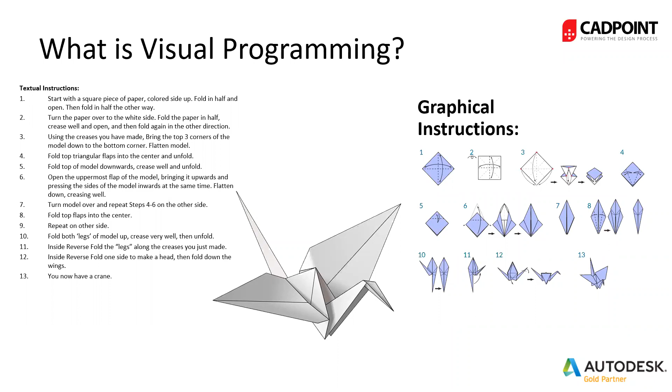It's the graphical representation of a set of instructions. You can see here on the left-hand side, it's to make an origami crane, for example. And you can see you might have a list of textual instructions, and that's the way you need to think about Dynamo. How would you instruct somebody maybe in a textual format or in a verbal format? You know, perhaps it's like if you think of an IKEA piece of furniture, you have a set of instructions, and that's then transferred into actually enabling to put something together. And that, again, that's the way to think about Dynamo. And then Dynamo is the visual representation of that textual information or instructional information that you're putting into it.

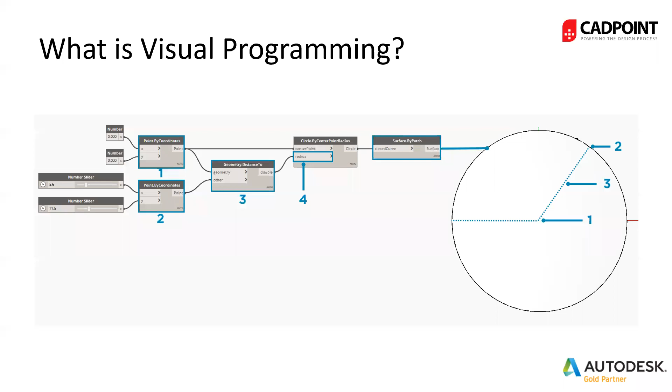And you know, it kind of varies. The steel size varies, or the steel width and height varies as the roof moves. But using something like Dynamo, you can actually automate the creation of all of those beams just by running one simple script. All you need to do is essentially define the height and select the top of your foundations.

And the roof was created first, the roof surface just as a single surface. And then the beam structure was created just by selecting the roof structure. So that's just how you can get really complex with Dynamo.

But today's focus is about getting started with Dynamo and how you can start to do very practical workflows, such as putting information into Excel, creating basic types of geometry in Revit. And the foundation knowledge is what we hope to deliver you today, that you're able to take that away and even watch back the recording of this particular webinar.

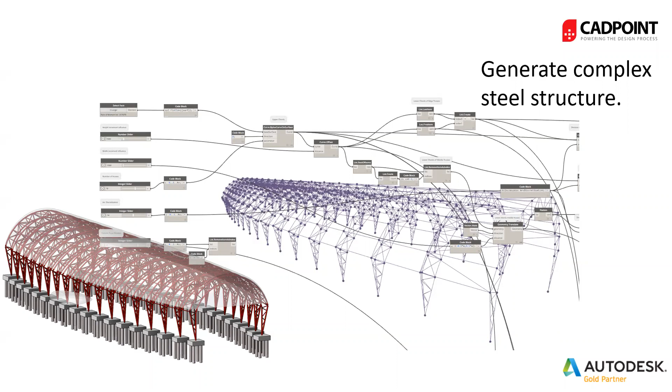And within the next kind of 30 minutes, I'm going to cover top 10 tips that I believe will help you get started using Dynamo, mainly focusing on architectural projects, but there's also other snippets in there, even if you're engineering or construction as well. So keep watching for that.

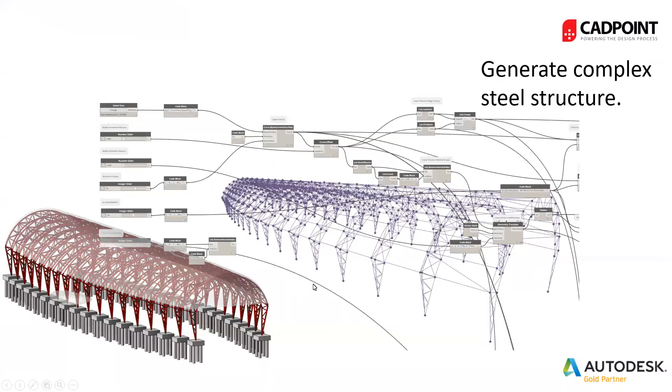Obviously, I'll keep a few minutes at the end for questions. I'm just going to jump into the demonstration that I've actually recorded here. And these are the top 10 tips as well.

So the first tip to get you started with Dynamo, it's good to understand at first that Dynamo is installed with all the latest versions of Revit. It is an open source software, so it's free. You don't need to purchase anything. There is Dynamo Studio, which is separate.

But just to understand that you find it under your Manage tab, and just at the end on the right hand side, you'll find something called Dynamo. So when you click on that, it will pop open a dark kind of user interface similar to this. You can see it floats over the top of Revit.

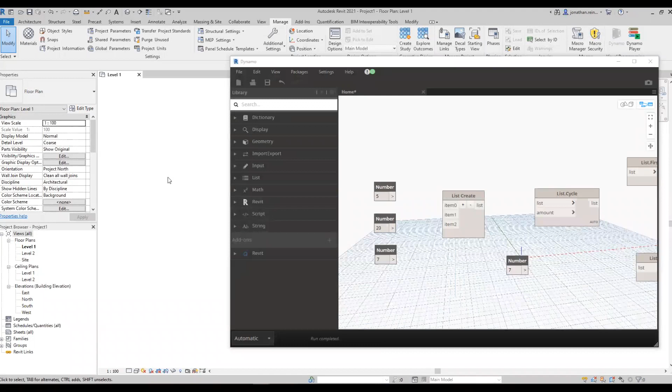And this user interface, I'm in Dynamo, but it knows that I'm linked into this particular project automatically just because I opened it. And that would be the same if I had another project open in the background. If I had a second project here and I clicked into that tab, it would know that I'm connected to that project. Therefore, anything I create within this Dynamo space will have an influence on the project if that's the type of script that you're executing.

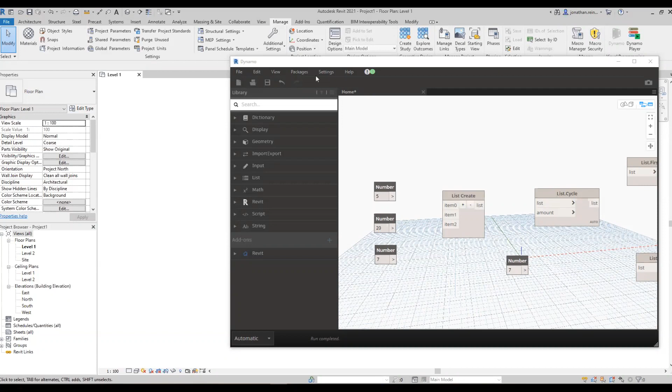And further on the user interface, within the Dynamo environment, you'll find on your left-hand side is where your nodes are stored. So this is essentially your node library. This is where you'll find the proprietary nodes that come installed with Dynamo, but you'll also find your third-party nodes here if you decide to use third-party nodes. There are a lot of them out there.

We won't go into them today, but just be aware that when you install third-party packages, they will appear under here under add-ons. So in the left-hand side here, you have your node library. You can manually click on each one and find what each node does. When you hover over a node, a little message box pops out and it tells you what it does.

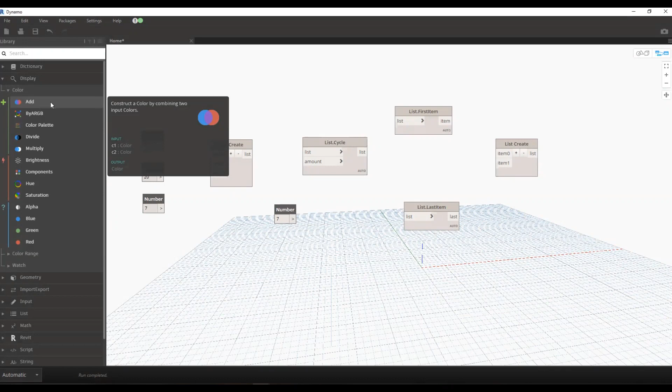When you click on that particular node, it will appear in your environment, and you can right-click on that, click Help, and it will actually bring you into a bit more information regarding what the actual node does in itself.

So you can also search for nodes in the search bar. So if I wanted to do something with Excel, for example, I could search for Excel and I can see import Excel. So that's one way of using the user interface, and then also being able to search in the node library as well. And you can also manually search within there as well by clicking.

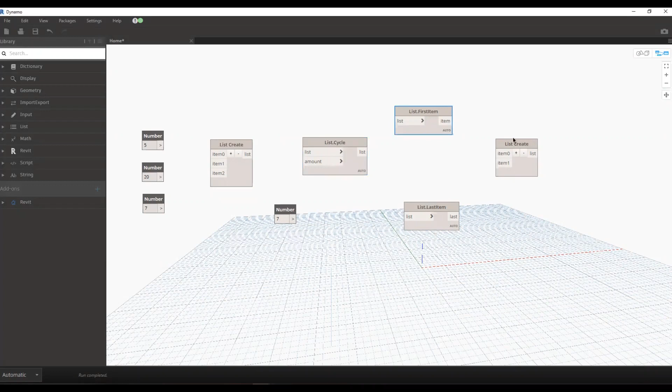So the second tip that we're going to cover today is just touching on what the actual nodes do. So what Dynamo does, it takes information that you give into the nodes and it changes that information in a certain type of way. So in order to create a script, it's made up of a series of nodes. So these are nodes here that we see on the screen in the gray boxes, and they all have different types of functions.

So the example here I'm going to show you is just using something called the list nodes. Now there are a lot of list nodes. So what list nodes allow you to do, it allows you to manipulate information from Revit in order to put it into either a different format or use it in a different way that Revit doesn't necessarily allow you to use it. So I'm just going to use a basic example here, just with some numbers, not in the Revit environment. We're just going to look at what list nodes do to a certain piece of information.

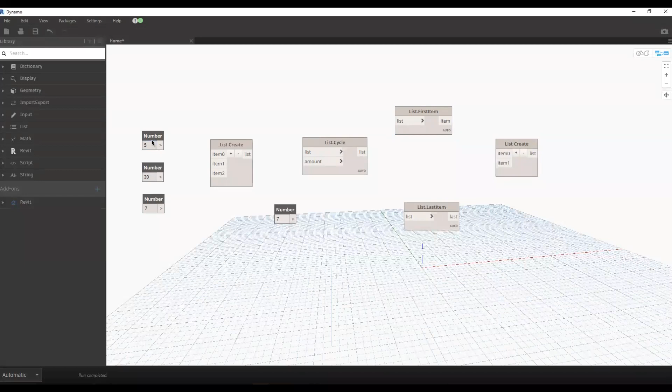So on the left-hand side here, I've put in some number nodes. So what these contain is essentially numbers. These could also be coordinates, they could be measurements, floor areas, quantity numbers, or any sort of information that you've taken from a Revit model, but I'm going to keep it simple for now. So what I'm going to do, I'm going to use something called the list create node. You can ignore all of this on the right hand side.

So the list create node, what I'm going to do, I'm going to pull all of these separate numbers together and put them together into one list. Very simple. So I'm just keeping this example simple just to explain the principle of it. So when I connect those in, you can see the top turns to a dark gray. That means that the node has actually performed its function and you've satisfied all of its requirements.

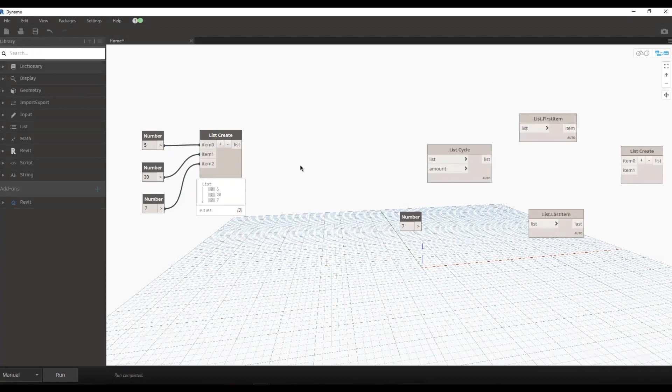So if I hover down to the bottom right, I actually see the result of this particular list. So that has taken all of these individual and separate numbers and put them into a separate list. So I'm just going to turn this off to manual from automatic. So that's put them into a separate list. So again, this could be parametric information, it could be measurement information or any sort of numerical information, or even it could be text information. You just have a text node put in here.

So further, to take that information and say you want to manipulate it in some way, we can also use something called a list cycle node. So what a list cycle node will do, it will ask me for an input of a list. So I know this is my list on the left hand side here. List is the output of this node and list is the input of this particular node. So because I can see that it's light gray, that means that I have not satisfied all the inputs, and the reason for that is because the amount one is still empty.

If I hover over this, it says amount, and in the bottom left it says int for integer. So it takes a number, or a programming term for a number. So I'm going to call that 7, and what this is going to do, it's going to actually create a cycle of these numbers 7 times. So it's taken 5, 20, and 7, and you can see it's created a list of all of those numbers. So 5, 20, and 7, 5, 20, and 7.

And I can see at the bottom, I can just confirm that I know that there's 3 numbers going into this list, and it's completing a cycle of it 7 times, and 7 by 3 is 21. So if I change that to 5, obviously it's going to change to 15, and it will create 15 items of each of those lists.

So say another couple of nodes that I want to manipulate list information with could be a list first item. So say, for example, you have a list of coordinates in here, and you only want to take the first coordinate, the last coordinate for whatever reason. You could use something called the list first item. So I can push that node in there. So the list first item is going to take the 5 out of this list, hit run on that, drop that down, it only gives me a 5.

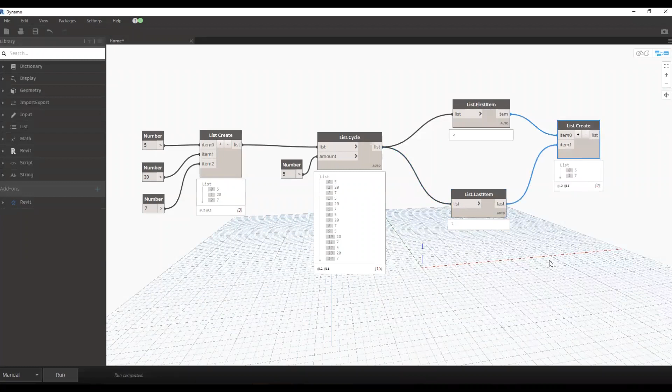And then if I put in list last item, this particular node, it will only take the last number of that node. So I just hit run and it's going to give me a 7 as a result here. And I can see I've got a 5 and a 7. And I'm able to then just pull those numbers together in a list create node, click run on that, and you've simply just pulled out the 2 separate numbers from this particular list.

So that's just one very basic way to understand how list works. And obviously you will be doing this with more complex information, construction information or design information, but just to understand the principle of those different types of list nodes. So to find the list nodes, you just go on the left-hand side, and you've got a list of different types of nodes under here that you're able to use. So it's good for you to get familiar with the different types of list manipulation that you're able to do with your Dynamo data.

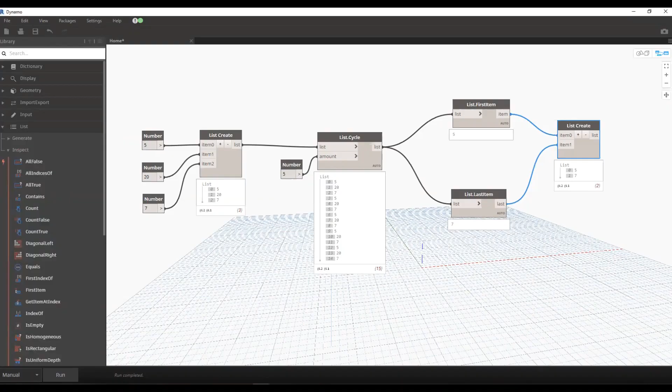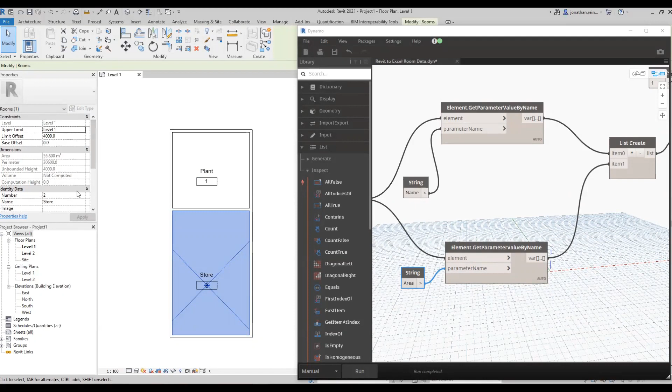The next tip I want to give you today is to show you how to target specific parametric information based on text values within your Revit project. So on the left-hand side here, we can see we've got a floor plan created, very basic floor plan, just of 4 walls and 2 rooms, a plant room and a storeroom. So within our Revit project, we know that if we select our room tag, for example, we can see we've got a series of parametric information here on the left-hand side.

Now, while it's not always possible to manipulate information from one set of parameters to another set of parameters within Revit, you are able to cross-match or bring in different types of parametric information into Dynamo and maybe push that out to Excel or some other type of CSV format, perhaps. So one of the nodes that I'm going to show you here is something called Element.GetParameterValueByName, and it does exactly what it says. And just to right click on this again, it gets the value of one of the element's parameters. So it's going to fetch the room parameters. I'll show you how I actually target the room parameters itself.

So it takes an input, Revit.Elements.Element, and that's just taking the room elements. This is taking in then the actual parameter name that I want to target. So this parameter name is exactly what I see here on the left-hand side. So if I wanted to pull in the area or the perimeter, I would create within this property box here one of those parameters from the left-hand side and put it in exactly as it is written in there. It is case sensitive, so just to be aware of that.

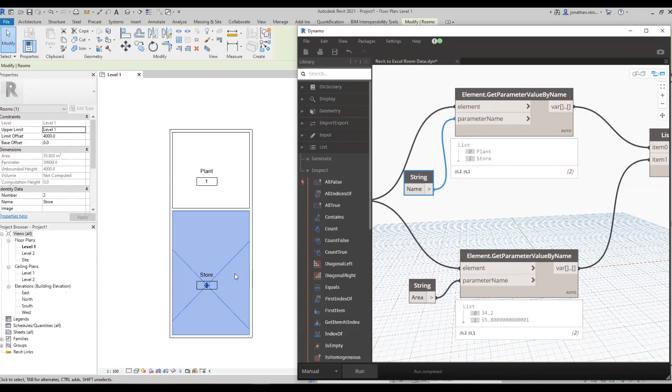So in this case, I've targeted the name parameter of the rooms, and I've targeted the area parameter of the rooms. So you can see that these are both of the nodes, and there are inputs. I won't go into that just at the moment. And when I hit run on this, it actually brings it into an Excel file, but we can see here that it's actually bringing that information. It's targeting the plant and the store, and it's pulling in those two room names, and it's pulling in the actual areas because I'm also targeting the areas of these particular room tags. So if I click on this storeroom tag, I can see the area is 55.8. That's my result here. And the same if I was to click on the plant room, it is 34.2. So you can see that's 34.2 as well.

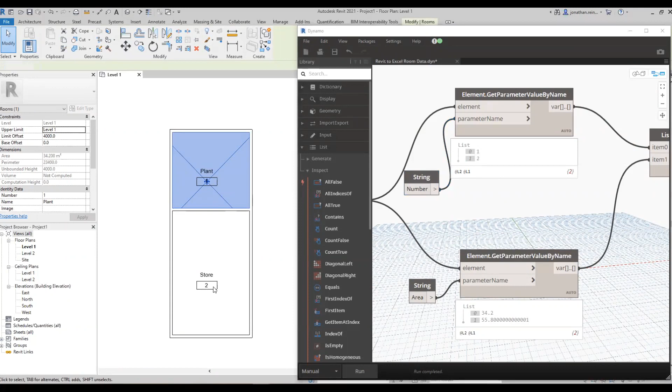If I was to then change this particular parameter that I want to target, so if I want to target the number, for example, I will just type in here, number, and make sure it's the same case as it's spelled here. Just click away into your space, hit run again, and I can see it's bringing in the numbers of those rooms. So number 1 and number 2, this is number 2, the store, and this is number 1 here. So that's just one way of targeting the parameter values by name.

The next tip I want to show you is about using selection nodes within Dynamo. So on the left-hand side here, you can see under your library, if you go to Revit and then go to Selection, there's a series of different selection tools. So essentially what selection tools allow you to do is select something within your Revit environment. So on the left-hand side, we've got All Elements at Level. So that will capture all of the elements at a certain level. You give it a certain level. All Elements of Category, so all of your rooms or all of your furniture. And there's a lot of different selection nodes here as well. There's also Categories, where you can just input rooms or a family category that is all selected at the same time.

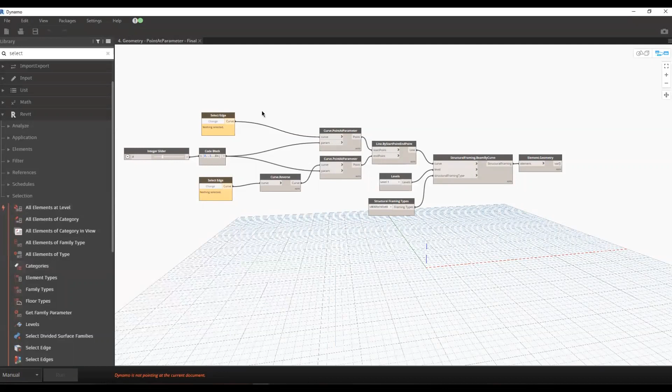So the example I'm going to show you here now is something called Select Edge. What this is going to allow me to do is select these two particular walls in here. We can see we've got a curved wall and we've got a kind of angled wall here. While I have my Dynamo environment open on the right-hand side and my Revit open on the left-hand side, I'm just going to select the different edges of these walls.

So simply by using the select edge, I'm going to select on the top one, I'm going to select that line there, and I'm going to select the bottom one as well. I'll show you the purpose of these. I want to capture those two lines. Say, for example, I wanted to connect beams across walls, I would use something like the select edge node.

When you use a select edge, it gives you the element ID of that particular element that you have selected. So that's the Revit ID of the particular object or family that you have selected, and the same for this one as well. So it's captured those two lines, and it's going to allow me to then manipulate that information in a further way depending what I want to do with it.

The fifth tip that I'm going to show you today is using this same script, but I'm going to show you how you would use these selection edge nodes in order to create a set of beams between these two walls.

This script takes two wall edges or wall locations and will connect beams across them, even though they're at two different heights or two different shapes, as you can see, a curve and an angle. If you were to model that in Revit, there's a bit of manual work involved, and if it's a more complex roof or a larger project, you're going to have a lot more modeling involved as well.

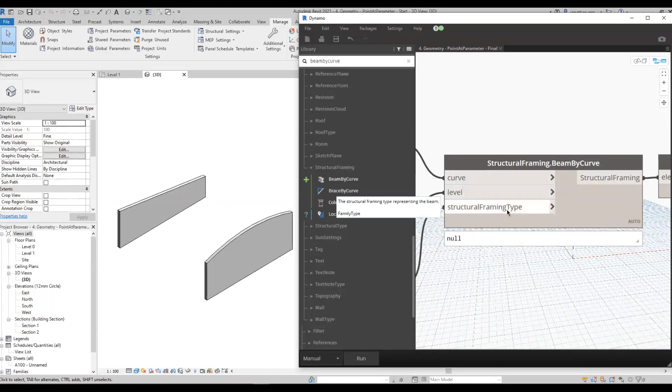So it looks for an input: a curve, a level, and a structural framing type. The output is the actual structural framing, and these are just some other nodes that create the actual geometry. In order to input a curve, I need the two lines that form the edges of these walls, and that is why I use the select edge nodes in there as well.

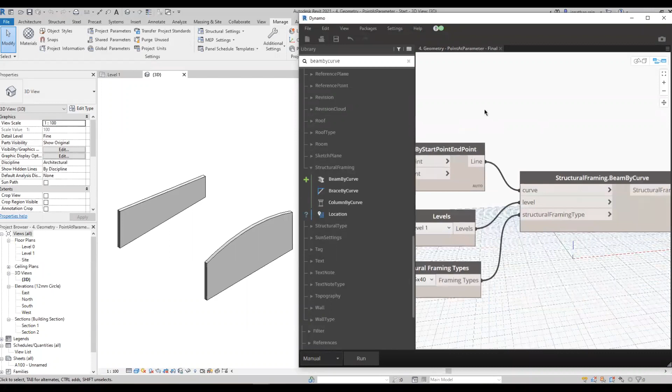All I've done is fed those two edge lines into something called a curve point at parameter, which gives me a point along the line, and then I create a line by start point and end point, and then I just use this node, structural framing beam by curve.

So I'm going to hit run on this script now, and you can see on the left-hand side it has created a set of beams, all angled and rotated to each end of the wall. Imagine if you create a complex roof, it becomes very beneficial in terms of time efficiency being able to do that. I also have a number slider connected in here.

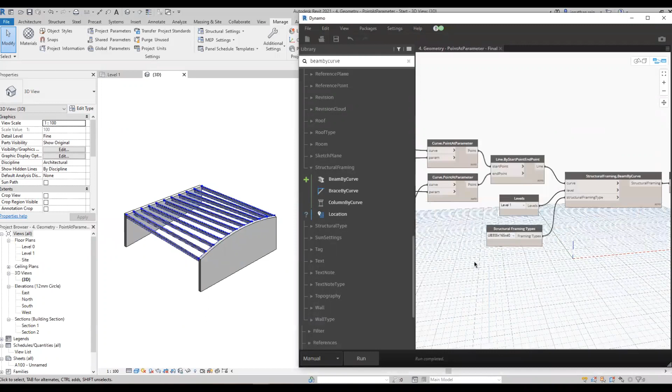I've defined that I want 8 beams across that particular wall. If I want fewer beams, 6 or 7, I can hit run, and it's only going to create 6 beams. If I go up to maybe 11 beams, it's going to create 11 beams all the way across. All it's doing is dividing that line, and the main node we're using here is the structural framing beam by curve.

So the 6th tip I want to show you here today is about bringing information from your Revit project into Excel, for example. And there's a node in Dynamo called Data.ExportExcel. And the way you find that is, again, go into your library, just type in Excel, and you've got data export and data import that you can both use.

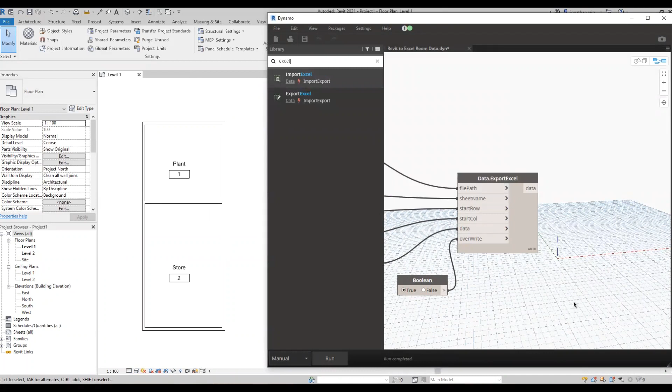So what we're going to use here is the data export Excel, and we're going to go back to the earlier example of the 2 rooms, and just to show you how you would get that information into an Excel file, for example. So again, we're using what we saw a moment ago in the name tag and the area tag of those particular rooms.

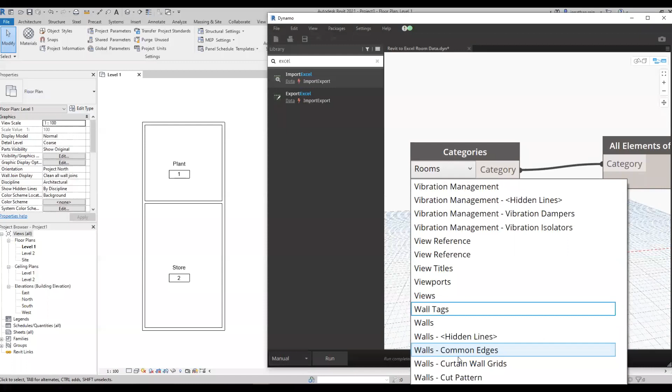So what we've actually used here, we've captured all of the categories. So if I was to drop down the categories node, for example, I can select all of the walls, and I can target all of the walls and any of the parameters using that get parameter value by name if I want. But for this example, we're just going to target all of the rooms. So I'm just going to go back down to rooms, make sure that's engaged.

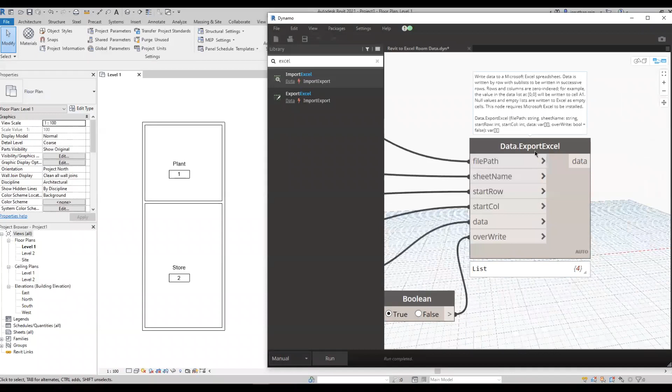When I hit run on this, it's going to do, as we saw earlier, capture the name and the area, but it's going to put them into a list, and then it's going to populate them into an Excel sheet. So this particular Dynamo node, Data.ExportExcel, requires an input, a file path, so you need to tell it where the actual file is. In this case, mine is actually on my desktop, so I've selected a particular Excel file that's on my desktop.

It looks for something called a string for a sheet name. So the sheet name is actually your sheet in Excel, and by default it's sheet 1, for example. It also looks for a number, your start row within Excel. It looks for a start column within Excel, so A, B, or C. And in this case, because it's Dynamo, it requires you to put a number in instead of the letter. And then we've used something called a list create node, which we saw at the start as well. And that just brings that information together, and it's pushing that information in there.

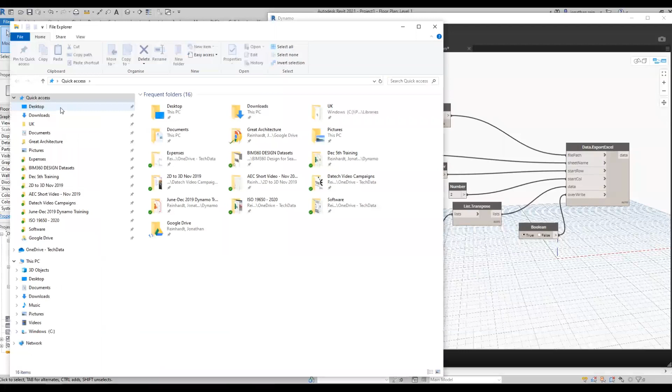So when I hit run on this, I can now open up my Excel file, Dynamo Room Data, on my desktop, and I can see that actual information has been populated in there. And you can see it's actually gone slightly over to the right. And the reason for that is because we've chosen the start row as being at number 1. So this is your second row, which is actually number 1.

In programming terms, it uses indexing, so your first item is always 0. So if we want to go in the first row, for example, 0, and our first column, press 0, hit run again, and we can see that that's actually moved up to there. So you can imagine if you start adding more rooms into this particular project. So I'm going to add another room, place another room tag. I'm not going to name it, just going to hit run on that.

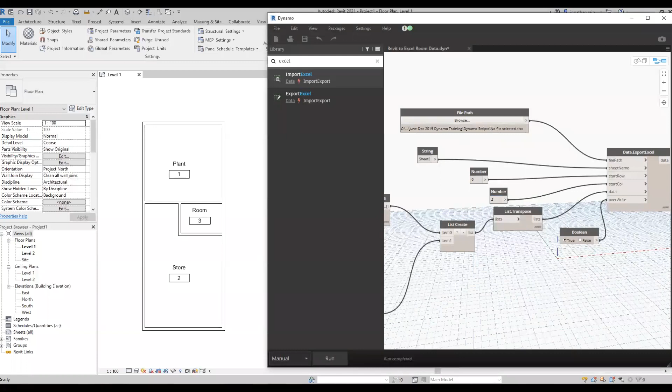So just an error came up there just to say that we couldn't overwrite that particular file. So all I did was direct it to a new file. Just when I hit run on that again, this is my particular file, and it's populated the additional room down here as well. So you can imagine if you have a complete list of information, you may have quantification or finishing information that you can also pull in from your Revit model as well. You can start to create quite usable Excel information that you can use on your design projects.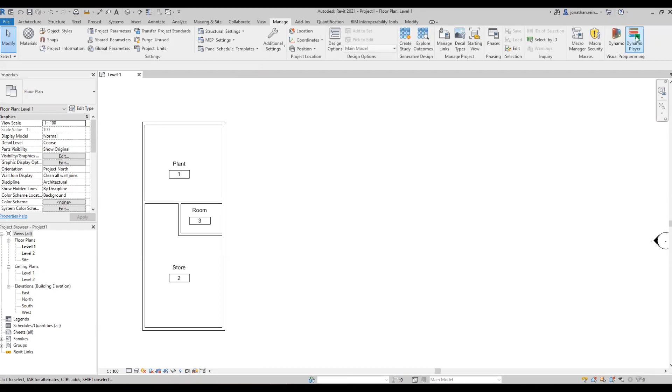The next tip I'm going to show you is actually how to use Dynamo Player. So you can see Dynamo Player resides here in the Manage tab as well. I'm just going to click on it. So what Dynamo Player allows you to do, it gives you an interface to almost hit play on scripts that exist in the background.

So this is quite useful for maybe people that don't know how to use Dynamo but are able to use scripts in a design office, and the scripts are maybe created by one person or multiple people, and then non-Dynamo users can use Dynamo Player just to engage those particular scripts.

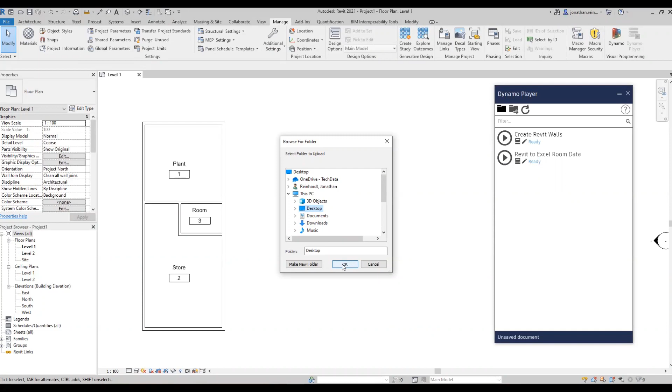So for example, all you have to do is direct to where your particular Dynamo scripts reside. And in this example, I've only put them on my desktop. So you could locate this to a central server, and you may only have read access to that server, therefore it's protecting your Dynamo scripts. So I've directed that to my desktop.

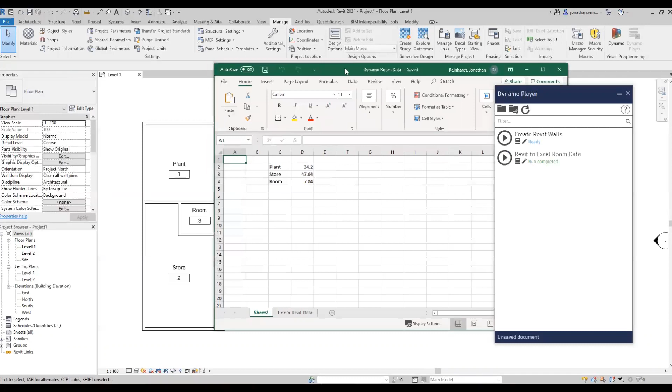I've got two scripts here. I've got something called create Revit walls. I've got another one called Revit to Excel room data, and that was the previous script that we just saw. So all I have to do, when I hit play on this, it's automatically going to capture all of this room data. So hit play on this, it will automatically open the Excel file and add in any information that it finds from within here as well.

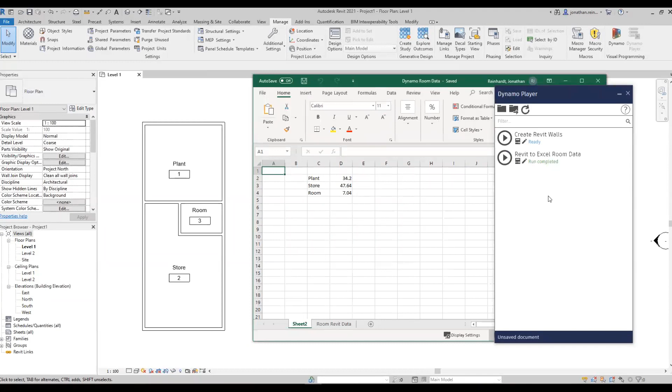So that's Dynamo Player. It can also be used to create geometry as well, or even to pull different types of information. So using Dynamo Player is very useful in your Revit workflows.

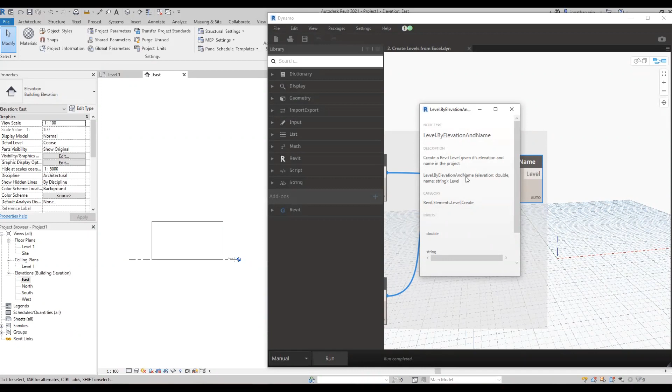The next node I want to show you here is something called level by elevation and name. And what this actually does, it actually creates levels from an Excel file or information that you input into it. So if I right click on it, create a Revit level given its elevation and name in the project. So where it pulls this information from is actually from an Excel spreadsheet.

So we can see here on the left hand side, we've got the name of all of our levels that will be created in our project, and we've got the elevations in millimeters that they will be based on. So this information could be pulled, for example, from your BIM execution plan, or even from surveyor's information, or from a structural engineer's information in a central location, but you're pulling it from an Excel file.

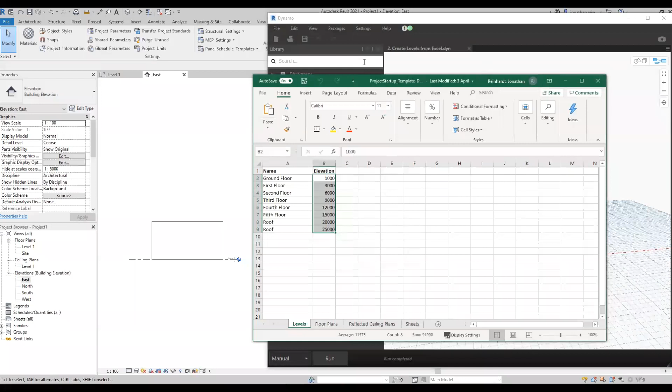So what I'm actually going to do, I'm going to feed this information from Excel through a series of nodes. So first thing I'm going to do, I'm going to have to direct where that information is read from. So this particular file path node is directing to an Excel file. It's pulling in that information. I'm telling it that I want the levels information. So it's using a data import to Excel file, not export.

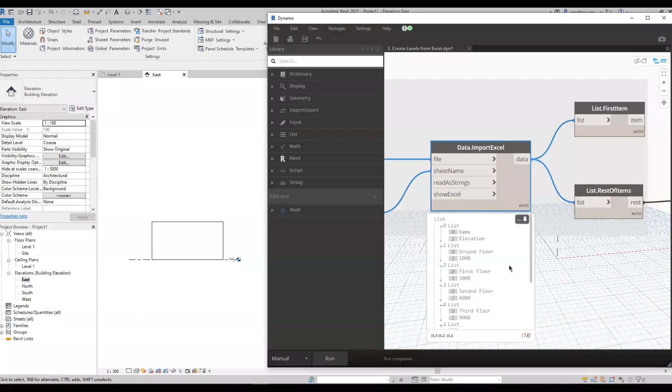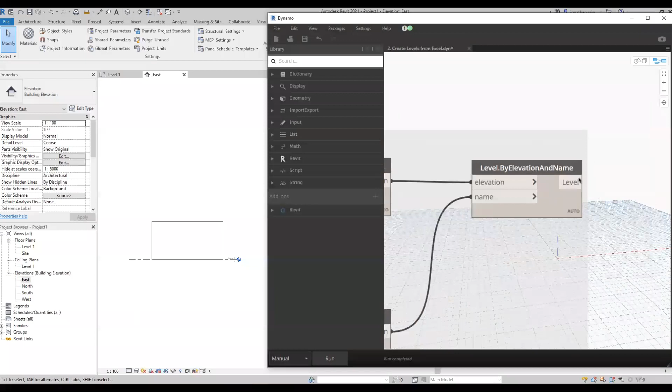And if I drop down this, I can see the results. It's pulling in all of that particular information and all the different elevation levels there as well. I'm telling it to pull the first item, which is actually the heading of it, and we saw that in the first example. It's pulling the heading, name and elevation. It's creating the Revit levels. It's getting items at index, and that will make sense after you run this script. And then it's actually creating the levels at the end.

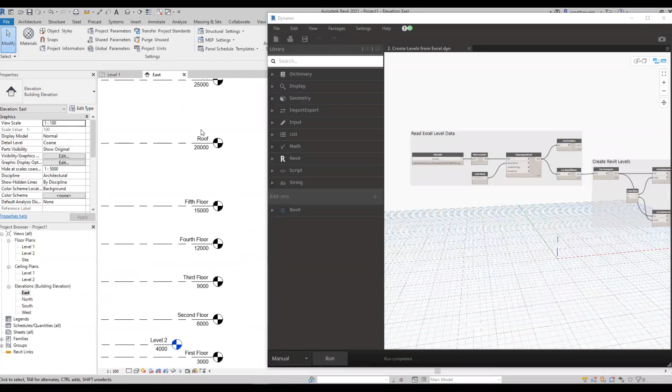So you can watch the recording of this video and pause and play it back just to follow this particular script. It's a very handy script and very easy to run. So as soon as I press run on this, you can now see within your Revit project, all of these levels have been created, individual selectable levels as taken from the Excel file that we inputted in here.

If I was to add in additional levels, run the script again, it's then going to create those levels again. So you can imagine if you have a complex project, identifying all your levels early on in the project can really add that efficiency.

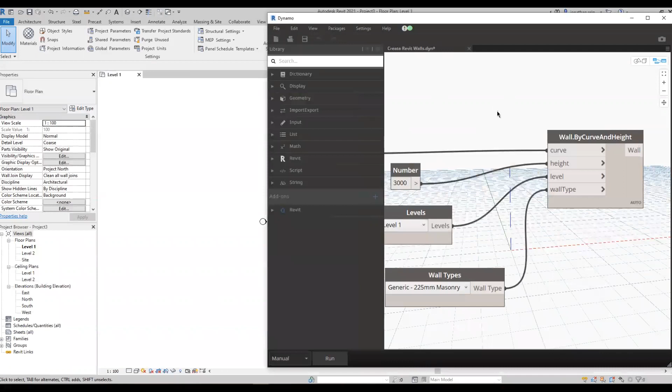The next tip I want to show you here today is how to actually create wall geometry based on coordinate information that you've inputted into a Dynamo script. So we can see here we're going to use a node called Wall.ByCurveAndHeight, and it's similar to the beam creation node. So if I right click on this, it creates a Revit wall from a guiding curve, so from a line by the height, the level and the wall.

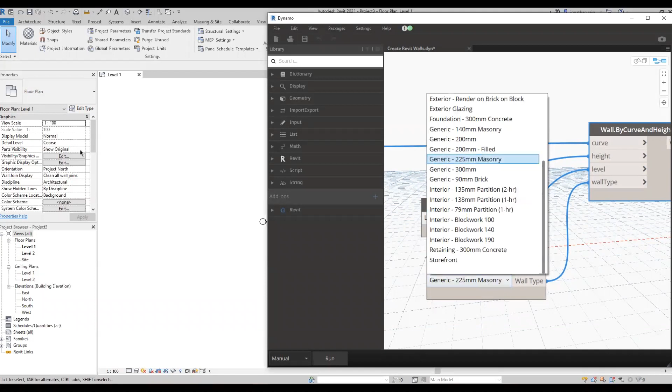So the inputs that it needs: a curve, so it needs a set of lines which I've given coordinates. It needs a height, 3 meters, it needs a level, and it needs the type of wall. So these walls are actually the walls that are loaded into my Revit project on the left-hand side, and it will only load in the walls that you have loaded into your Revit project. So it intelligently knows that it's linked. I've used the List.Create node as well, and I've used something called Line.ByStartPointEndPoint, Point.ByCoordinates.

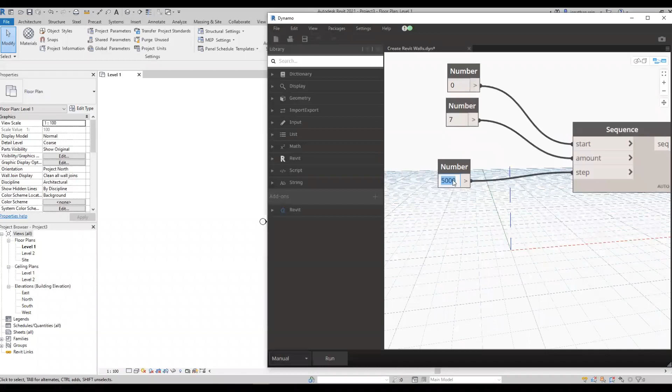So I've actually given a point by coordinates by 10 meters, and my y is at 0, and I've used something called a sequence, and I want to set it out 7 times, and each one to be spaced apart by 5 meters. I know that may not make sense, and I'll show you the relevance of that now. I'm going to show you that I have a blank screen on my left hand side here. I'm just going to open up a 3D view, hit run on that, and we can see that's actually created the Revit walls based on the information that I've inputted here.

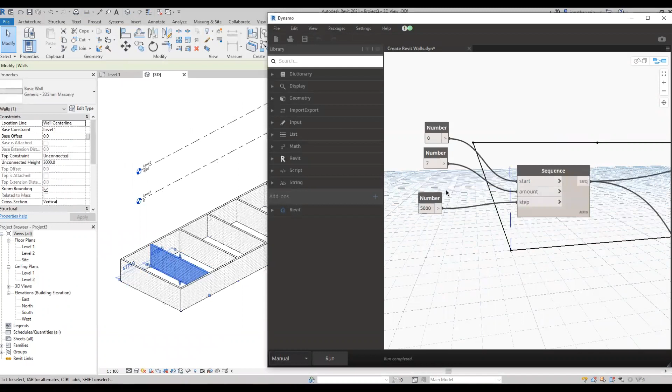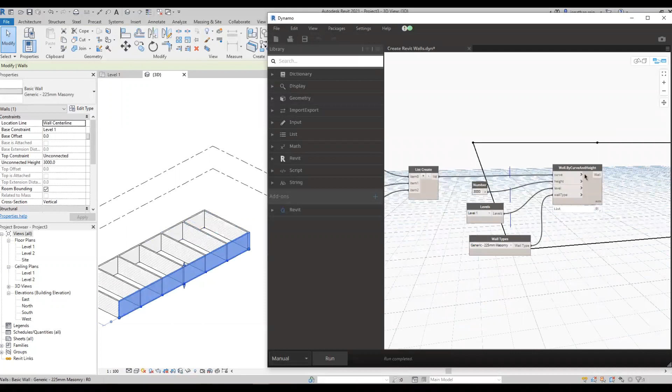So the information is based on using a sequence. It spaces out 7 times, so across here 7 times, and it spaces out 5 meters at a time. So that's the space between each of these walls. Then it creates something called point by coordinates, 10 meters apart. That's the front and back wall. Line by start point, end point. So it connects all of those lines, pulls them all together, and then using the wall by curve and by height, it creates the actual wall.

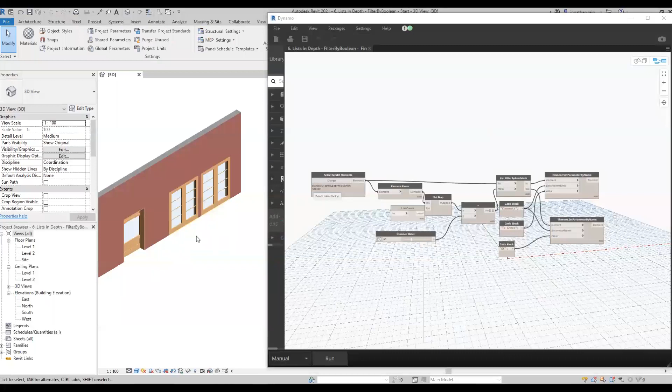The next script or tip that I want to show you here is being able to use Dynamo to actually check and count geometry within Revit objects. So if you have high geometry information in your Revit file, you can actually check that by using Dynamo. So here we have an example of 3 doors. We've used a select node, select model elements, select all of these 3 doors.

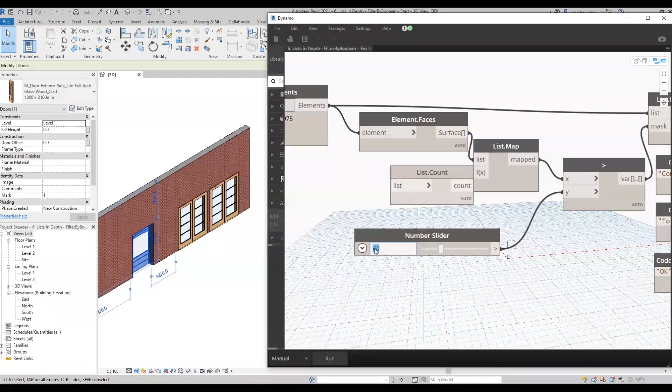And what we actually want to do is populate each element's comments parameter, and we wanted to check if the number of faces of the geometry is below or above a certain number. So we want to check here using 60: if the geometry of a particular selected element is above 60, we want to put in a comment called to check because it's too high for our requirement. Or if it's below, we want to say that it's okay, in that it's low geometry and that's the size of the family that we're happy with.

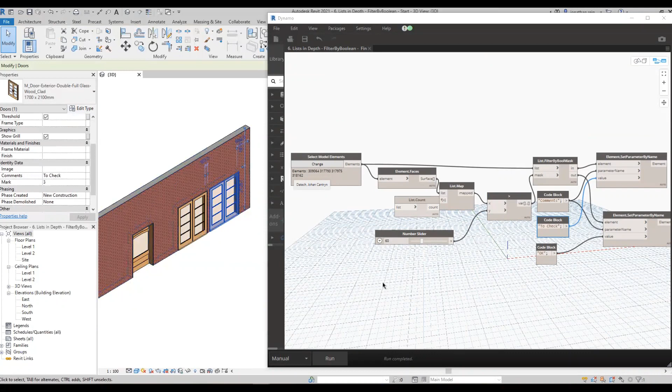So I'm just going to hit run on this particular script, and you can see that the doors have now populated. This window is below the 60 faces within it, so it's flagged OK. This one, we can see in comments, is actually above 60 faces, so it says to check. And this one as well is above 60 faces, so we have to check that as well.

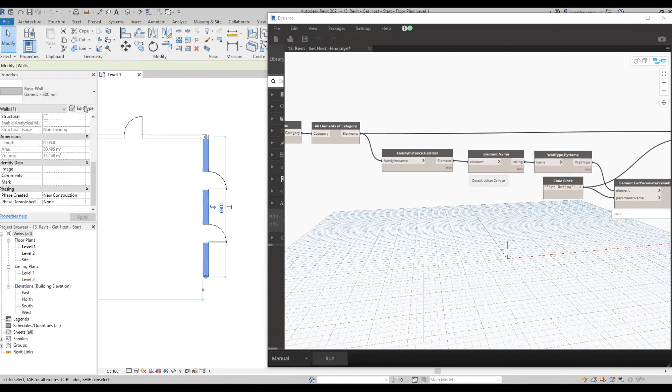And the last and final tip and script that I want to show you is a particular workflow that allows you to capture the host of a particular door, which is this wall, and take the fire rating of this wall and populate it into these doors. We can see here each of the doors has a fire rating parameter, which is now empty, but we know that the fire rating of the wall is contained within the type parameter. Within our fire rating is 2 hours, and we now want to populate our doors which don't have a fire rating in them.

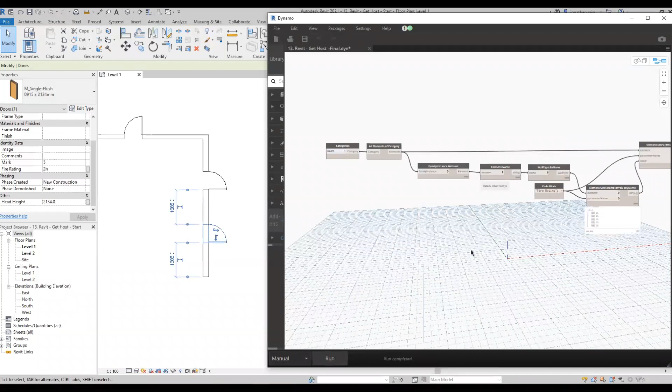So this particular script uses Element.GetParameterValueByName, but it also uses Element.SetParameterByName. All it's doing is pulling in the door information and checking it against its host. So when I hit run, it's run that script, and you can see now these doors have the same fire rating as the wall that they're hosted in. If I select this one, this is a 2 hour wall.